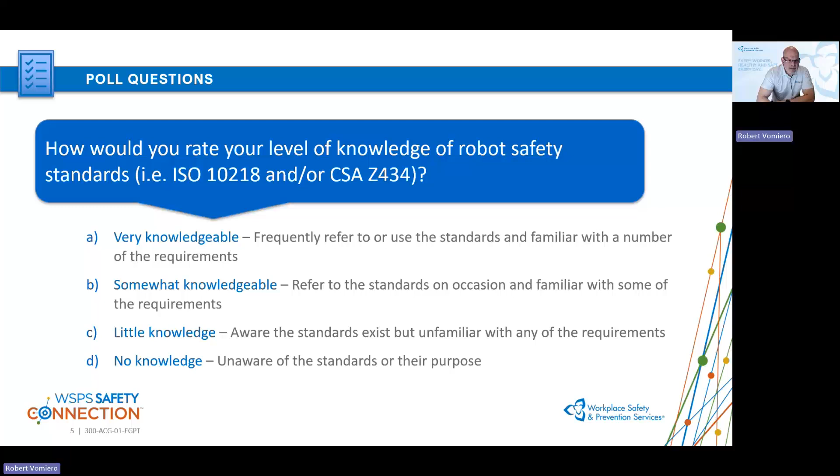Another poll question: to what degree has your workplace implemented robot applications that involve collaborative tasks? For those of you that are newer and not sure what that is, we will talk about that later on. But if you can take a minute and respond to the poll, that would be great.

Okay, so we're getting responses coming in. A few of you, about 10%, have incorporated multiple collaborative robotic applications. About 44% have incorporated one or two collaborative robotic applications, and a good number of you have not yet implemented any collaborative robot applications.

So why do we ask this question? The main reason is, as you'll see when I get into the content, the new Z434 includes and has implemented a significant amount of guidance with respect to collaborative applications. We will talk about what collaborative applications are and what collaborative tasks are. Basically, collaborative tasks are tasks where humans and robots share the safeguarded space or work together within the safeguarded space in close proximity, including in some cases making contact with each other. Now, of course, the robot requires certain safety functions to do this. We'll get into this a little later in the presentation, but it's certainly a field of robotics that's taken off, and we're seeing it more and more within workplaces. The new CSA Z434 provides significant guidance that did not exist in the previous version with respect to collaborative tasks and collaborative applications. So stay tuned for that.

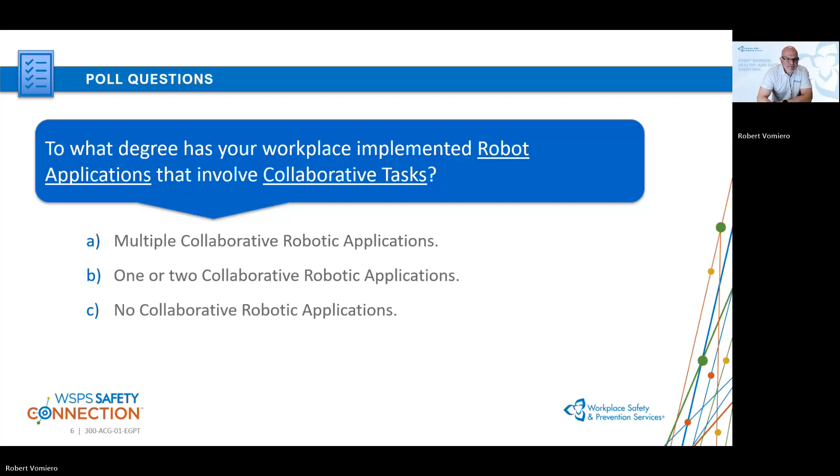Okay, so it's important to note that CSA Z434, the new 2026 version, is a full adoption of ISO 10218:2025 parts 1 and 2. You're going to hear me mention this over and over again throughout the presentation. But for those of you that are newer, yes, just like we did previously with CSA Z434-14, we have adopted the international industrial robot standard, ISO 10218 parts 1 and 2.

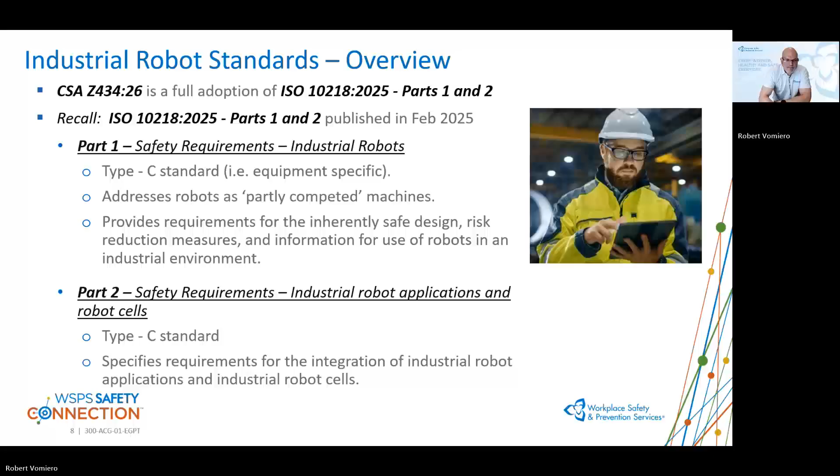So again, Part 1 focuses on requirements related to the robot, including safe design, risk reduction measures, and information for use in an industrial environment. Whereas Part 2 focuses on the application and the industrial robot cell. So in Part 2, we take the off-the-shelf robot and integrate it into the application. I know that's a review for some of you, but definitely worth mentioning.

So please note, just to be clear, the outgoing or withdrawn North American National Industrial Robot Standards. In Canada, the previous version of the robot standard was CSA Z434-14. That was a modified version of ISO 10218-2011 Part 1 and Part 2, and actually contained Canadian deviations. There was quite a number of deviations which provided additional Canadian-specific information and user requirements.

In the US, because I know probably some of your companies have locations or may have locations both in Canada and the US, the outgoing industrial robot standard in the US is RIA R15.06-2012. That was a full adoption of ISO 10218-2011. In other words, there were no deviations included in it. But the old version of the US R15.06 standard was the 2012 version.

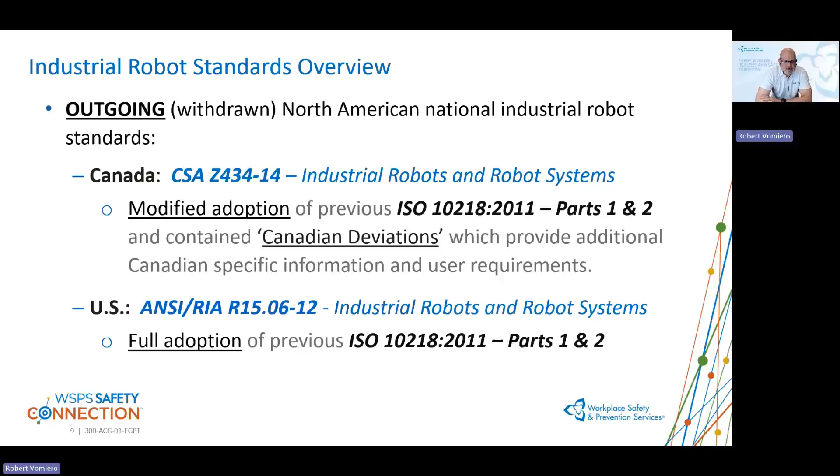We already mentioned that the new and recently published version of Z434 is the 2026 version, and it was published in May of 2026. And in the US, the current version of the industrial robot standard is A3 R15.06-2025, which was published last year in October of 2025.

So if you recall, I mentioned ISO 10218-1 and 2. The newest version was published in February of 2025. The US adopted that international standard as the US national standard in October of 2025, and we now have also adopted it in Canada as of May 2026 as our Canadian national robot standard.

Now, there are still a few deviations which are editorial in the Canadian standard, and some deviations related to Canadian-specific references, but I want to emphasize that both Z434-26 and R15.06-2025 are technically the same as ISO 10218-2025 Parts 1 and 2. Okay, so technically there's no difference between the Canadian, US, and international standard.

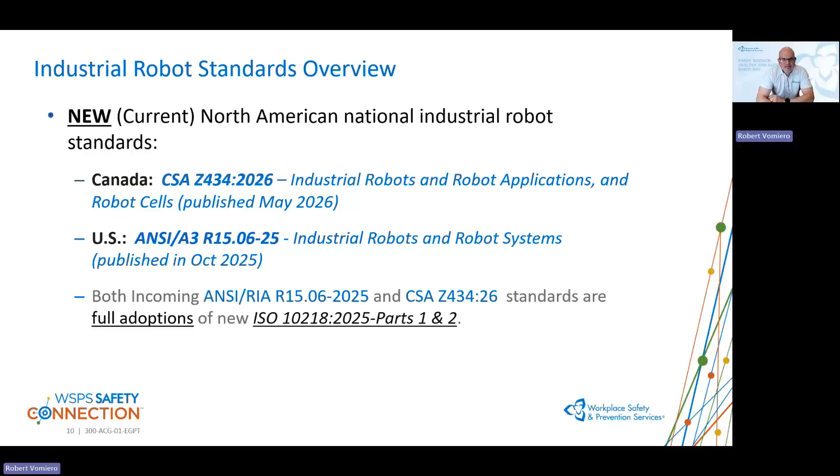So I already mentioned, but again, we can recall that Part 1 of CSA Z434 focuses on the robot. And really, it is intended for the robot manufacturer. So the robot manufacturer really needs to meet, if they want to claim compliance with Part 1 of the robot standard, the requirements outlined there. So think of your Fanuc, your ABB, KUKA, Nachi, UR, whoever. They're obviously going to be very interested in the requirements outlined in Part 1.

Whereas Part 2 talks about the robot application and cell integration. So again, it focuses on the application in the robot cell, and it is intended primarily for the robot integrator. So the robot integrator is that entity that takes the off-the-shelf robot and then integrates it into the application or the robot cell.

Okay, so no change there. The new Z434 still has a Part 1 and a Part 2. However, what is new is that both CSA Z434 and A3 R15.06 have developed and added an additional part, which is really a new standard. So in Canada, we have a new part to the standard called CSA Z434.1, and in the US, they simply refer to it as Part 3. This additional standard focuses on a piece that was frankly missing in previous versions of the standard. It focuses on safety requirements related to the use of industrial robot cells, and this new standard, the CSA Z434.1, focuses on end user requirements.

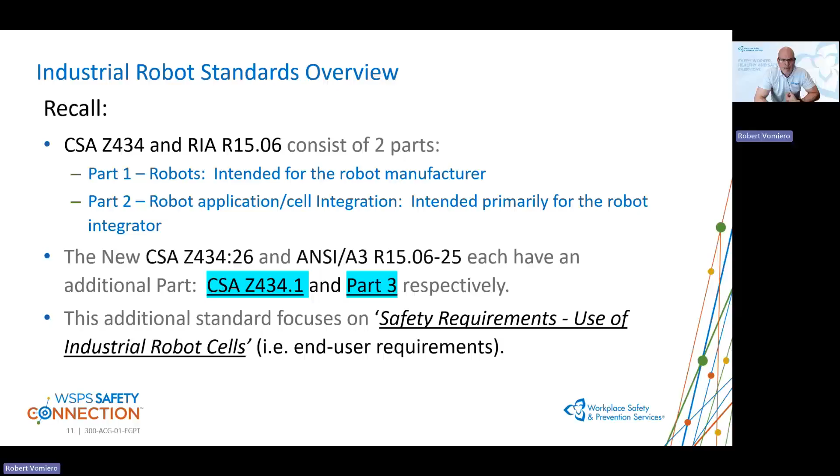And we'll take a bit of a look at what Z434.1 contains towards the end of this session.

Now, I didn't want to get too far into the weeds, but I did want to just highlight some terms and definitions that are included in the new CSA Z434 and highlight some changes in these terms and definitions, which will provide context and understanding with the direction that this new standard has gone in.

So the first term is the industrial environment. The new Z434, just like the previous version, focuses on robots operated in an industrial environment. There's no real change there. And of course, an industrial environment is a workplace where the public is restricted from access or not reasonably expected to be present for the intended tasks and robot applications. So we don't really expect the general public to be exposed to these robotic applications with respect to this standard and who these standards focus on.

Now, the industrial robot, or the definition for industrial robot, remains mostly unchanged but has been tweaked. So an industrial robot, again this is a bit of review for many of you, is an automatically controlled, reprogrammable, multi-purpose manipulator, programmable in 3 or more axes, which can be either fixed in place, and then... this is where the definition diverges between the previous and latest version of Z434.

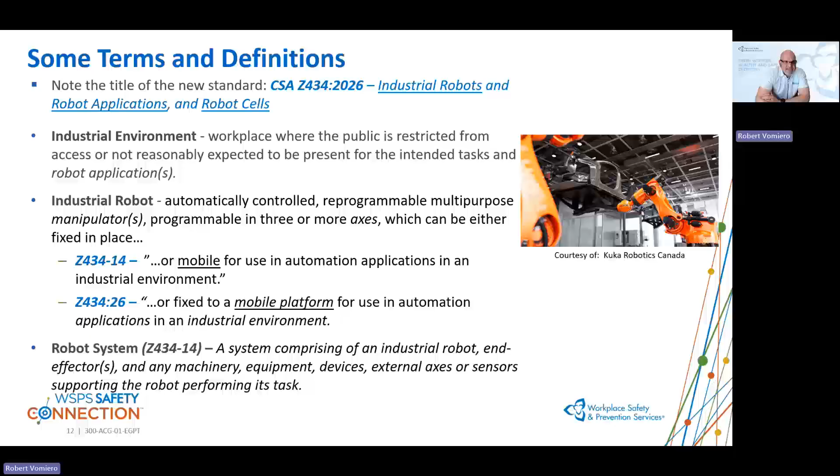In Z434-14, the robot system was defined as a system comprising an industrial robot, end effector, and any machinery, equipment, devices, or external axes or sensors supporting the robot performing its task. You'll notice in the next slide that the scope of this definition has been reduced for Z434-26.

The robot system now focuses on the industrial robot, end effectors, and any end effector sensors and equipment needed to support the end effector. Some of the other broader aspects that speak to the robot application used to be included in the definition for the robot system in Z434-14.

The term robot application is a new term, defined as a machine comprising an industrial robot system, incorporating the robot system, work pieces, task program, and machinery and equipment to support the application and the intended tasks. This new definition of robot application is quite similar to the previous definition in Z434-14 of the robot system.

I wanted to highlight that difference because you'll notice that the new title of the Z434 standard uses the term robot application instead of robot system, which is why I felt it was important to highlight this and why this change occurred.

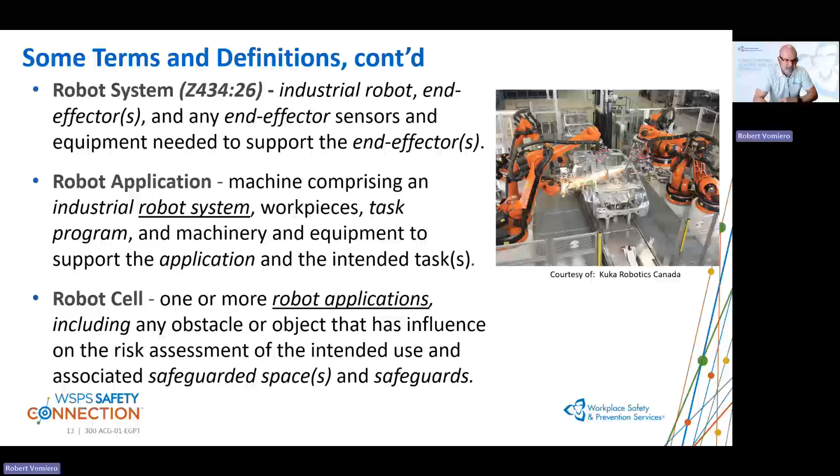It is the industrial robot application, and robot cell standard. The term robot system is no longer in the title of the standard, at least in our Canadian standard.

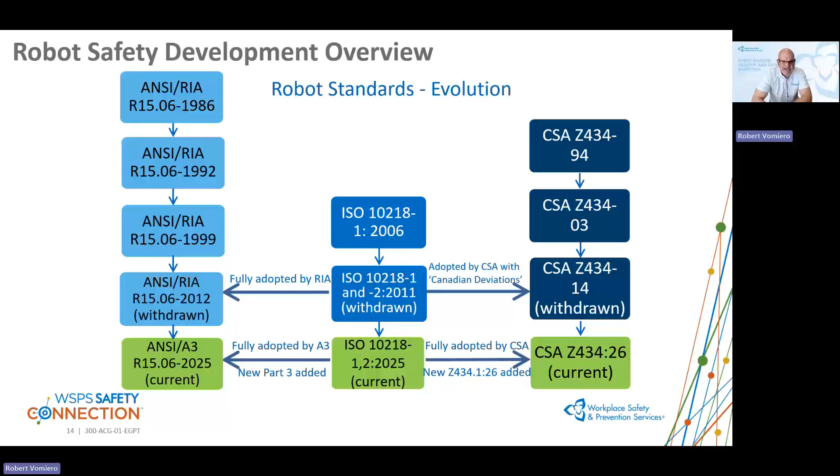All right, so that pretty much covers the general overview of the standards and gives some background on their development, the different versions, and what the different parts focus on.

I'm just taking a quick peek at the chat. I'm not seeing any hands. Marius, I'm not sure if there's any questions in the chat. Nothing for now. Okay, good. I think everybody's paying attention to the changes.

All right, good stuff. So I think we're going to move to the next topic where I highlight some of the changes in CSA Z434-26.

The first thing I want to talk about, which is a very important topic related to machinery safety in general, but certainly with robotics and robotic applications: something that hasn't changed is that a risk assessment is still required in both Part 1 and Part 2 of the standard. In Part 1, a risk assessment shall be performed for the robot that focuses on hazards and risk reduction measures related directly to the robot, since Part 1 focuses on the robot.

Typically, the risk assessment will include some form of a failure mode and effects analysis that focuses on the design aspects and possible failure modes of the robot. So things like robot materials, strength, other areas like braking capabilities, lifting points of the robot, and so on. It really looks at the grassroots design requirements for the robot.

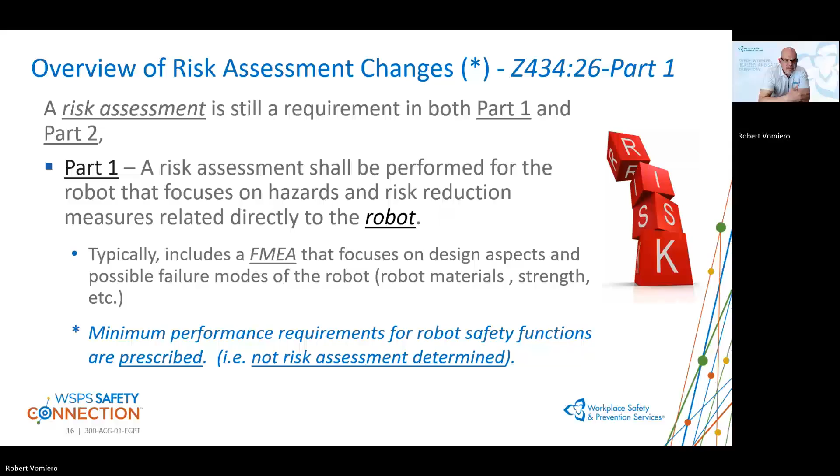One thing you'll notice, and that we're going to talk about in more depth later in the presentation, is that in this latest version of Z434-26, minimum performance requirements for robot safety functions are prescribed. They are not risk assessment determined in Part 1. You're going to see what that means when we come back to performance requirements and safety functions later on, but I wanted to highlight this point in relation to the risk assessment for Part 1.

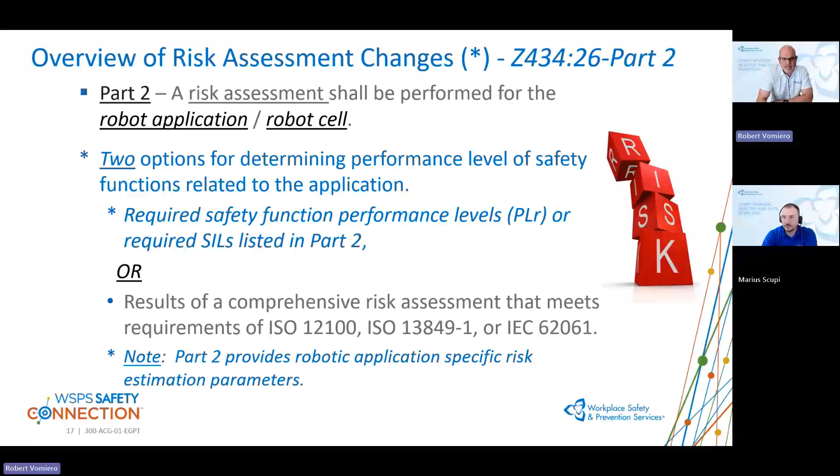So I talked a little bit about some of the changes with respect to the risk assessment. The big takeaway there was that risk assessments are still required for both Part 1 and Part 2, but I highlighted some of the changes in Z434:26.

What I'd like to do now is just summarize some of the other changes that you will find in the new CSA Z434:26. For those of you that plan on purchasing the standard or maybe already have some kind of viewing subscription with CSA, you will find a summary of the changes in both Part 1 and Part 2 in the foreword. I've just summarized these here, and we will go into a little bit more depth with some of these, not all of them, in the upcoming slides.

So in Part 1, we have additional requirements for the design of the robot itself, because Part 1 focuses on the robot. Things like robot position holding requirements without power. There's a lot more guidance provided on position holding requirements when power is interrupted to the robot actuators. What it speaks to is the reliability of that hold position, or that stationary position of the robot. There's been clarification and additional guidance provided with the braking or position holding capability of the robot outlined in Part 1.

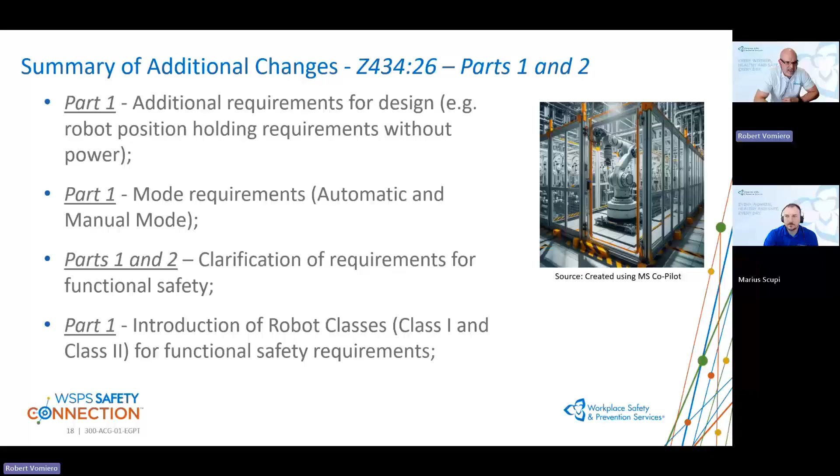Another change in Part 1 is test methodology to determine the maximum force per manipulator, or to verify the maximum force per manipulator, for Class 1 robots. So with the introduction of robot classes have come test methodologies in Part 1 for verifying that a Class 1 robot meets the Class 1 criteria.

Another Part 1 and Part 2 change is added requirements for cybersecurity. Not a ton of information, because there are other standards that focus on cybersecurity that Parts 1 and 2 point you to, but there is an added requirement with respect to a cybersecurity threat assessment for both the robot and the robot application - to prevent hacking of robots that operate through or on networks. We want to prevent hacking and outside influences taking control of our equipment and creating unsafe situations potentially.

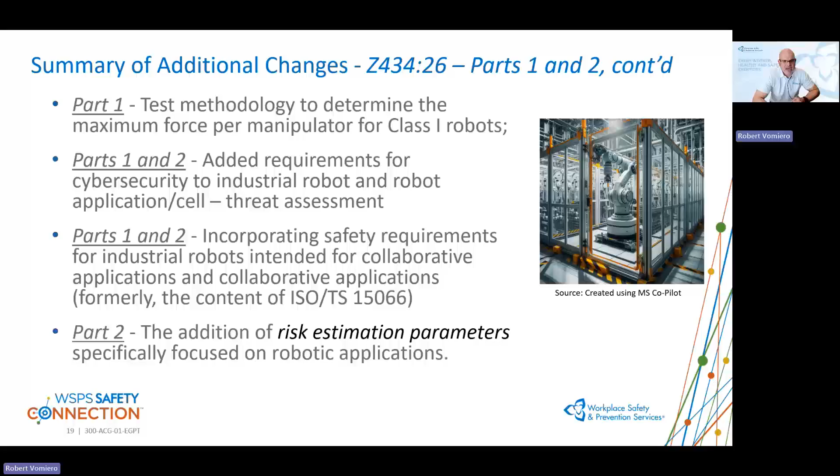And you will find these in the foreword of both Parts 1 and 2 of the new standard.

One new addition to both part 1 and part 2 is that a cybersecurity threat assessment shall be conducted. Cybersecurity measures for threats related to safety risks are to be implemented, which is the reason why we do the threat assessment. We want to ensure that unauthorized access is prevented to the robot control system, plus its hardware, software, application software, and any related configuration data. So the bottom line is we want to prevent outside influences from gaining control of our robot and our robot applications. I've highlighted an IEC technical specification and an IEC standard that focus more on cybersecurity risk assessments.

We don't get too much further into it than this for this presentation, but you are going to notice that many updated machine safety and robotic safety standards are going to include a requirement for a cybersecurity threat assessment. So let's continue looking at an overview of some of the changes.

All right, high-speed manual mode is not going to be allowed within the safeguarded space any longer. Is that okay? No questions with regards to that? No questions yet. All right, we'll keep going then.

This next slide goes back to functional safety requirements and performance levels of safety functions. The SRPCS, which stands for the safety-related parts of the control system, minimum safety performance requirement in the previous version of Z434 was a performance level D, structure category 3. This was for both the protective stop and the emergency stop functions. In addition, in the previous version of Z434, a risk assessment could determine alternate performance requirements.

Now, it was felt that there was a lack of clarity, or some ambiguity, with respect to performance requirements for specific robot safety functions in the previous version of the robot standard. Also, since CSA Z434 and ISO 10218 are Type C standards, equipment specific, it was felt that increased clarity was needed for performance levels of specific robot safety functions for both the robot and the robot application.

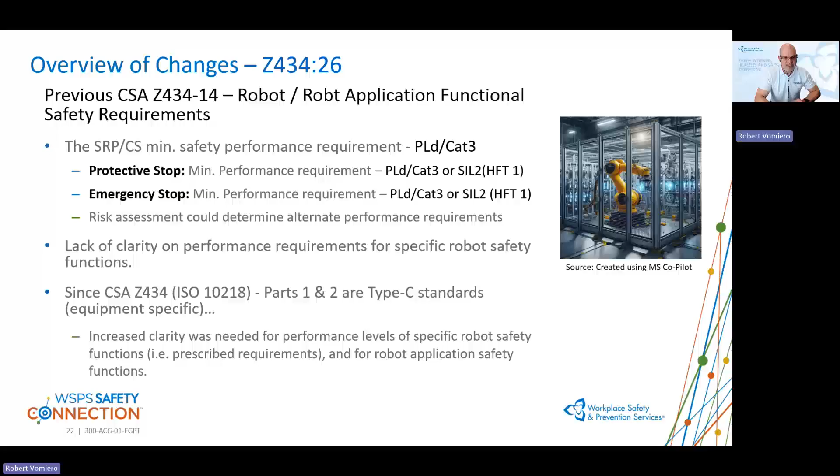So these are very new concepts in the new Z434 standard. And there are functional safety implications related to Class 1 versus Class 2 robots, which we're going to look at in the next few slides.

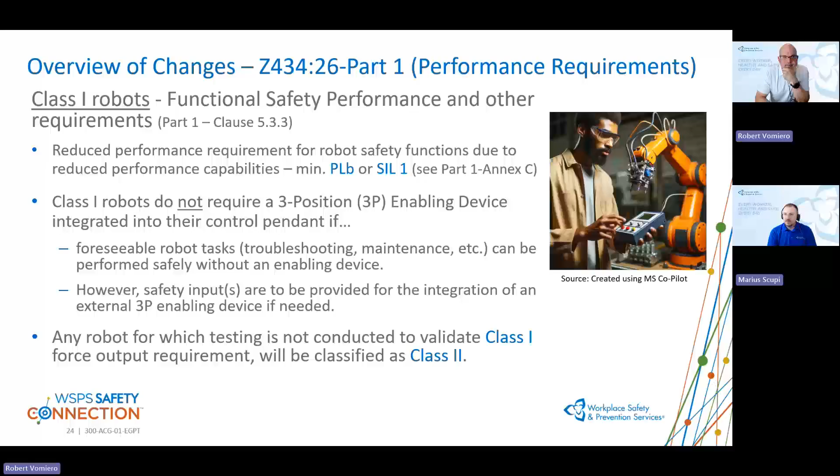Did I see a question, Marius? Yes, there's a quick question related to the mass on the previous slide - is the mass related to the payload, including the end effector, for the classification of the robots? I believe it does include the mass, but maybe we can mark that and I can verify. I think it does include the end effector and the payload, and certainly with a 10-kilogram robot. Actually, I'm going to recant and respond more definitively - it does include the payload. As you know, robots are rated based on their payload capability, so that 10 kilogram would include the payload, but I will double check just to make sure, and we can get back to whoever asked the question, Marius? Sorry, I'd have to take a look at my chat. Taylor Wood - okay, so Taylor, I'll verify that just to make sure, but I'm fairly certain it does include the payload of the robot.

Yeah, which would include the end of arm tooling and the part. Okay, which I know is not a lot, but hence the low risk related to the class 1 robot.

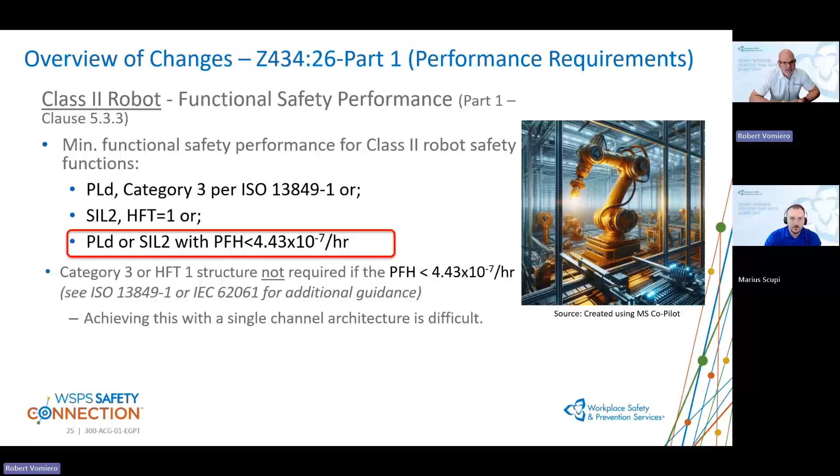This tells us that if you're following the previous version of the standard and your robots met the minimum performance requirement of PLD, Cat3, or SIL2 with an HFT of 1, you're going to be fine with this new robot standard as well. But with electronic systems, different approaches, different ways of achieving performance levels are now possible, which is the reason why this additional criteria has been added.

I also want to highlight that for Class 2 robots, in Part 1, Annex C, there are a couple of tables that have been added or included. They're referred to as Table C1 and C2. Table C1 are robot safety functions that must meet the minimum performance requirements of either a PLD Cat3 or a SIL2 with a hardware fault tolerance of 1, or a PFH of less than 4.43 times 10 to the negative 7, what we just looked at in the previous slide.

These are, of course, your more critical safety functions related to the robot, such as interlocking functions, protective stop, mode activation, software-based limiting, which limits the reach of your robot, for example, to prevent the robot from making contact with your perimeter guarding. So these are some of the more critical, and there's a whole list in Table C1 of Part 1. These more critical safety functions have to meet the higher performance level requirement.

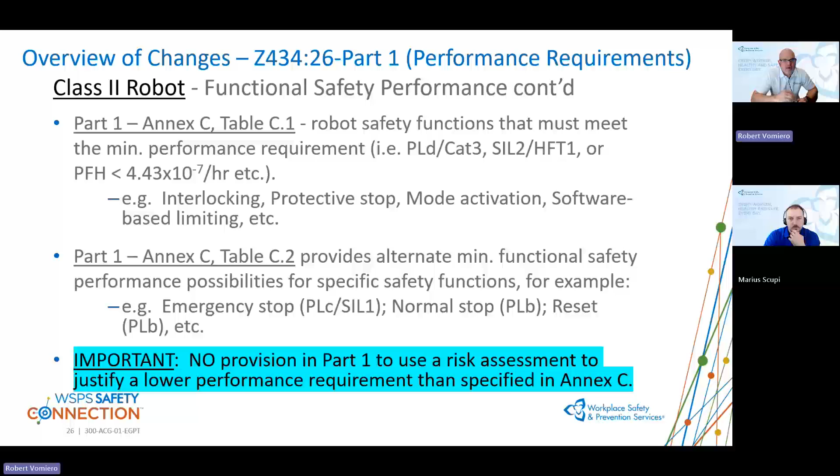Right, so I'm not seeing any questions. I'll keep going.

So what about Part 2? Similarly, Part 2 has added some additional functional safety performance guidance for the application. Like I mentioned earlier, there are safety functions built right into the robot itself, and then you're going to have safety functions related to the overall robot application. So Part 2 is a little bit different, and in some ways similar to the previous version of Z434.

2014, in that there are two approaches for the integrator to determine the performance of each required safety function. Again, there's an Annex C in part 2 that has a table C1, which lists safety functions and the performance level for safety functions related to the robot application. However, there's option 2: to perform a risk assessment and determine the functional safety performance for application-related safety functions based on the result of that risk assessment.

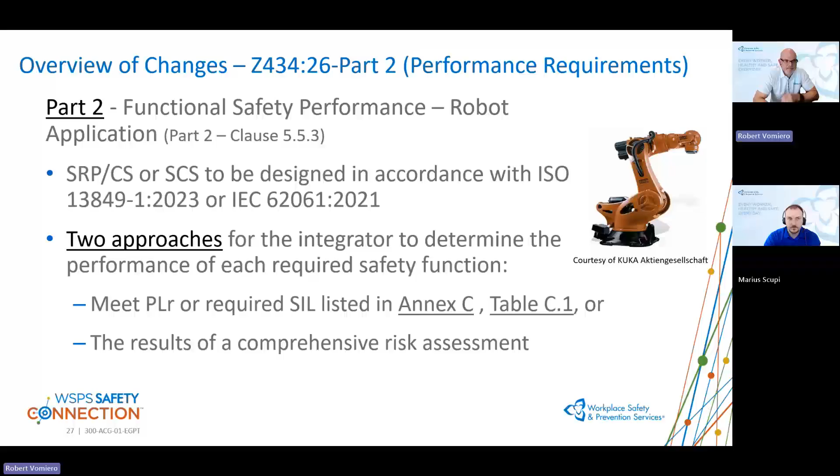And that's basically what we're talking about here. Of course, the prescribed performance level for safety functions in part 2, as you can imagine, aligns with part 1. So it's PLD category 3, SIL2 with a hardware fault tolerance of 1, or the probability of dangerous failures per hour being less than 4.43 times 10 to the -7.

And as I mentioned, this last requirement that's been added for performance requirements of safety functions in part 2, like part 1, has been added because newer electronic-based systems can achieve this very low probability of dangerous failures per hour with some of these newer electronic system technologies. Whereas with your mechanical or electromechanical based safety functions, you really can't achieve PFH of less than 4.43 times 10 to the -7, because you need to achieve a very high diagnostic coverage and a very high mean time to dangerous failure for the safety function. So this new criteria added in both part 1 and part 2 is really for electronic systems or subsystems, okay?

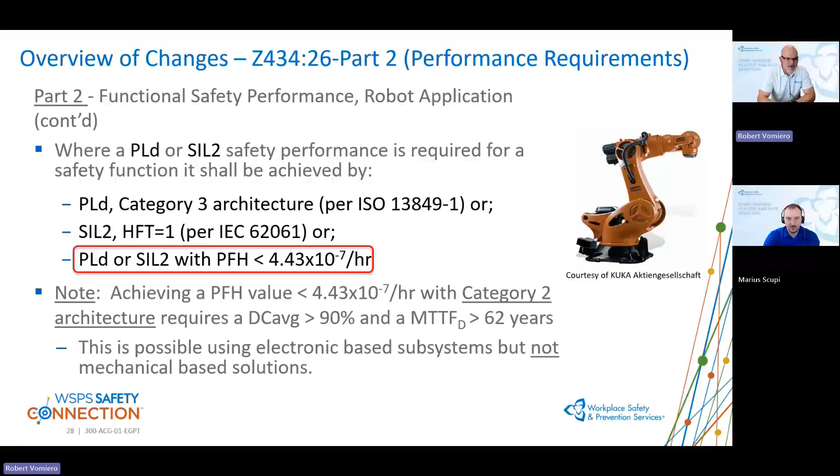So again, I'll take a quick pause. I'm not sure if there's any questions about functional safety. Not yet, no. But we're going to move off that topic and move on to stop functions.

There's a lot that's the same in the new Z434 as the previous version. Of course, the new Z434 requires that there be an emergency stop function, which is a function intended to avert or reduce existing hazards, as well as a protective stop function, intended to stop the machine in response to a safety-related event. Our emergency stop devices are integrated into the emergency stop function, and our other safeguarding devices like light curtains, safety interlock switches, and so forth are integrated into the protective stop function.

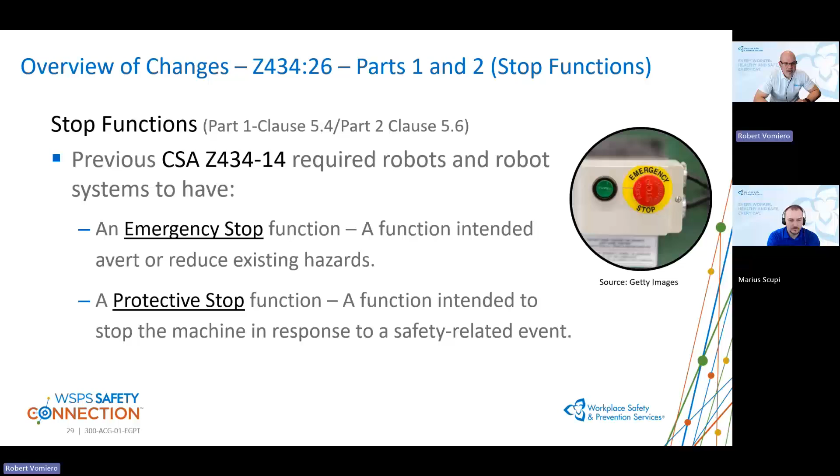Something new in the new CSA Z434 in relation to stop function is the requirement to include a normal stop function, which is a function intended to stop a machine as part of routine operation. It has a lower performance requirement, minimum performance level B. The normal stop is intended for your day-to-day stopping of the robot application or the robot as part of normal operations.

Of course, we don't want to hit an e-stop every time we want to stop the application under normal operation, because the emergency stop can be much harder to recover from. It's a type of stop that's much harsher on the system, in that it may not retain some of the logic, some of the positioning logic related to the robot and the application and so forth. The big reason why... oh, go ahead, Marius.

Sorry for interrupting, Rob. We have a quick question from Diana. She's asking if the normal stop function is intended for minor servicing tasks. I would have to say, without going too far into that very important and relevant topic, definitely not. The normal stop is not intended to be used for minor servicing tasks. It's meant to stop the robot once integrated into the application itself. Think of the end of a shift, stopping your application once the operator is ready to leave. It's a way of stopping the application.

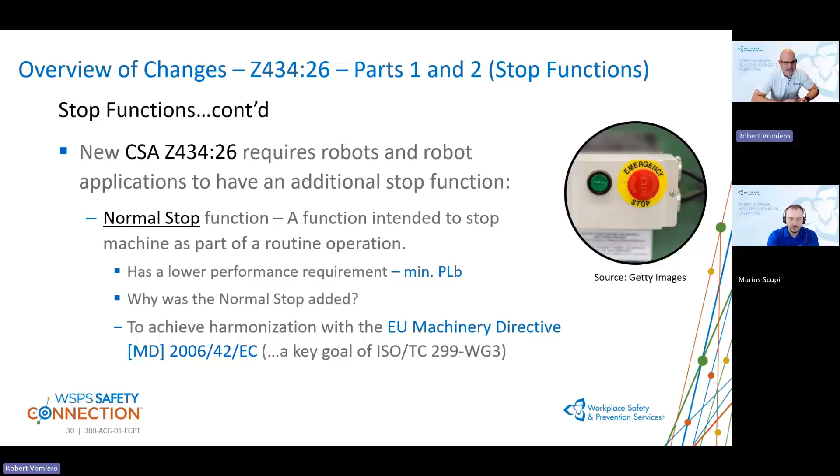Again, the reason for the answer there. Why was the normal stop added? Just as an FYI to everyone, which is not maybe a big issue in Canada, but when the ISO 10218 latest version was being developed, they wanted it to be what is referred to as a harmonized standard, meaning it needed to be harmonized with the EU Machinery Directive. The EU Machinery Directive does include a requirement for a normal stop in conjunction with the other stop functions. So this is one of the big reasons why this was added to the standard, not to make everyone's life difficult, but really to try and make this a harmonized standard internationally.

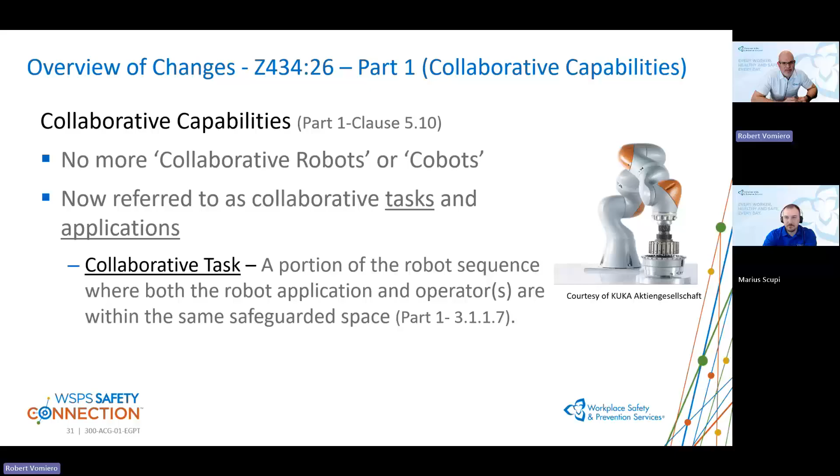In other words, safeguarded space sharing with the human will have to consist of certain collaborative capabilities or safety functions. So a new term you're going to see in Part 1 is the collaborative task. It is a portion of the robot sequence where both the robot application and operator are within the safeguarded space.

When we talk about what those actual collaborative capabilities are, there are 3 in Part 1: hand-guided control, speed and separation monitoring, and power and force limiting. Now, these used to be referred to as types of collaborative operations, but they're really not. These are actual collaborative capabilities that industrial robots have to be equipped with in order for them to be suitable for collaborative tasks.

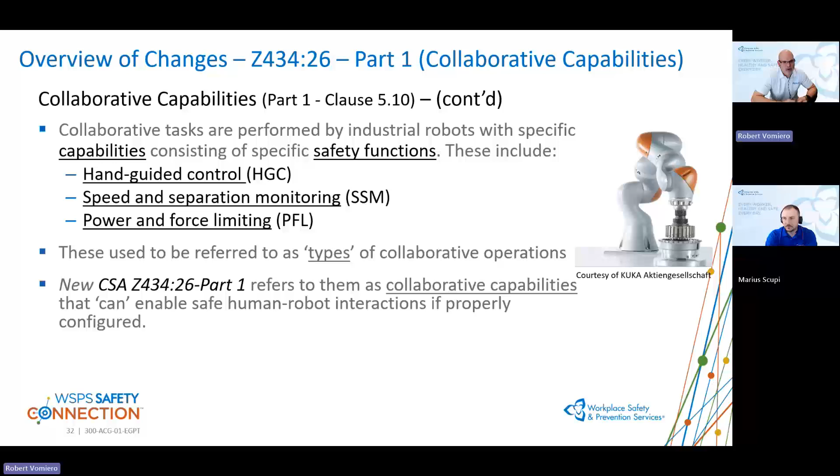There used to be another collaborative capability included in the previous version of the standard called safety rated monitored stop. This has been removed in the new CSA Z434, and the reason is that what we used to refer to as safety rated monitored stop, now referred to more correctly as monitored standstill, is actually a safety function that is incorporated into the other collaborative safety functions or capabilities. In other words, hand-guided control, speed and separation monitoring, and power and force limiting all involve the monitored standstill safety function, so it's really not a standalone safety function or collaborative capability on its own. Hence the reason why it is not listed separately as a collaborative capability or safety function.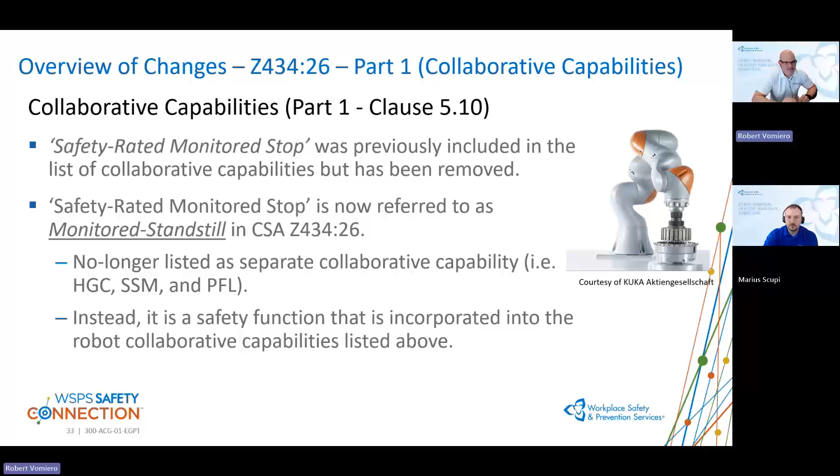Okay, so that deals with the robot itself. What about the application? Again, a new term you're going to find in Z434-26 Part 2 is the collaborative application, which are robot applications that contain one or more collaborative tasks. Part 2 provides guidance on risk reduction considerations for collaborative applications, not just the robot. So the risk assessment is required to determine protective measures to identify possible contact events between the human and the robot, and risk reduction measures to prevent quasi-static crush hazards and transient hazards, otherwise called impact hazards.

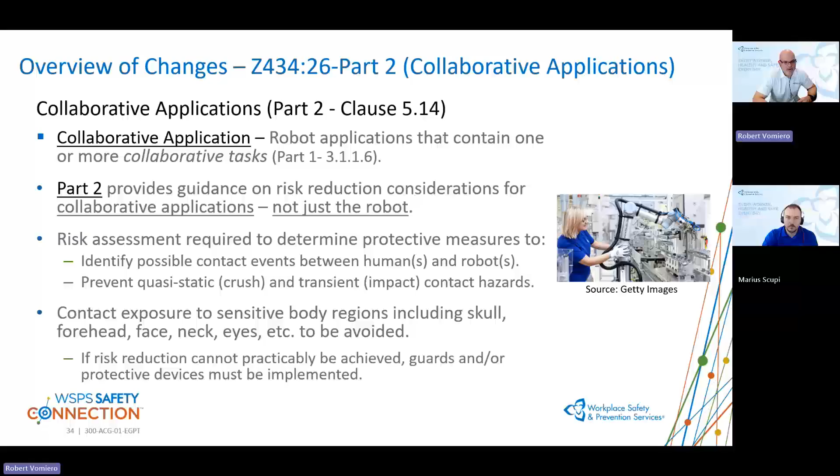Also, contact exposure to sensitive body regions, including skull, forehead, face, neck, eyes, and so forth, needs to be avoided. And where risk reduction cannot be practically achieved in the collaborative application, there may be a requirement to add traditional safeguards to prevent those contacts with sensitive areas. So these are just some things to think about when we're talking about collaborative applications. The risk assessment really has to focus on those contact events and interactions between the human and the robot.

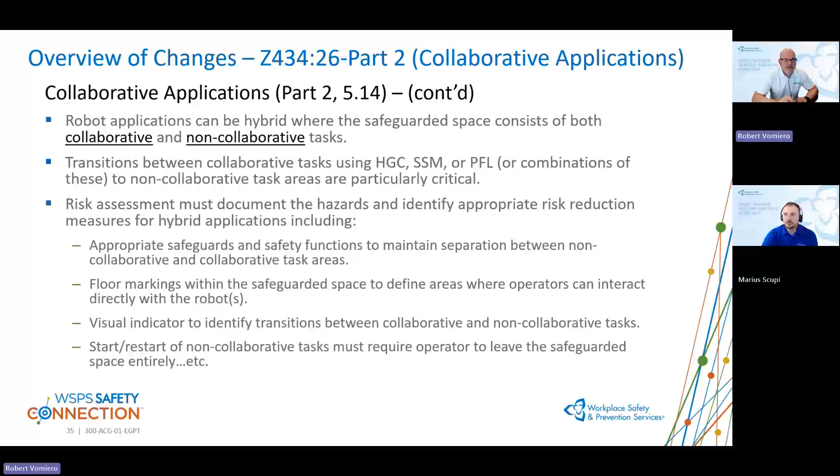We can also have hybrid applications, which can include both collaborative and non-collaborative tasks. The non-collaborative task would be more of your traditional tasks where your robot operates at higher speeds, higher force and pressure outputs, and so forth. In these types of hybrid applications, the transition point between the areas of where your collaborative tasks are being carried out and your non-collaborative tasks become very critical, need to be appropriately safeguarded, and definitely need to be focused on in the risk assessment.

Just a bit more of an aside with power and force limiting collaborative applications, just to highlight what we're seeing in the field. Unfortunately, I don't have too much time to spend on this, but collaborative robots are not inherently safe. Contrary to maybe some misconceptions that exist in workplaces and in the field, they are not inherently safe. And collaborative applications may or may not require safeguarding. It all depends on if they are configured correctly. So please do not assume that collaborative applications automatically do not require safeguarding.

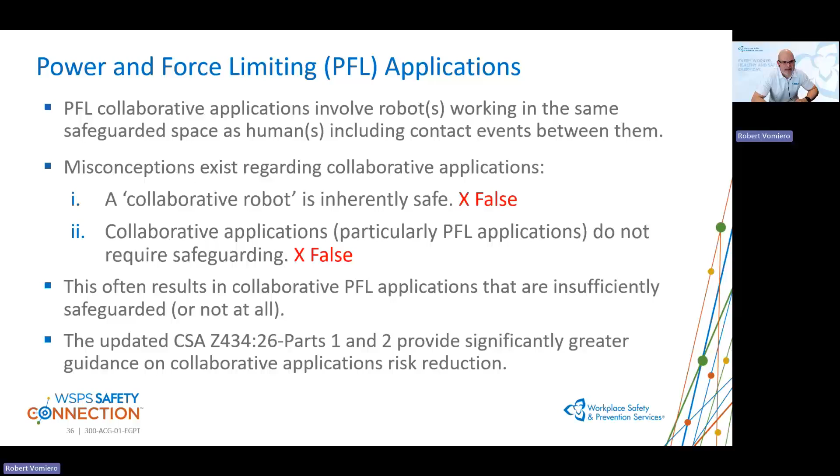I just want to highlight those two things. Please, if you need more guidance on this, please reach out to us. Or again, your pre-start providers that have experience with collaborative applications, because there is more guidance we can provide on this.

Please also note that some of that significant additional information you will find in Part 2 with respect to collaborative applications is Part 2 Annex M, Table M2, which is a table of biomechanical force and pressure limits for 29 regions of the body that the robot application cannot exceed, in order to keep those interactions between human and robot low risk.

Also, Part 2 Annex N provides guidance on the validation methodologies for maximum force and pressures related to collaborative applications, and some guidance on the use of pressure and force measurement devices. So again, Annex N is an informative annex. It's intended to provide guidance, so it's not normative per se. But what is a requirement in Part 2 is that some form of verification and validation, i.e. testing of pressure and force outputs for power and force limiting collaborative applications, is performed. So the validation of those power and force outputs for your collaborative capable robot and robot applications must be validated, and that is definitely a new requirement in Part 2 of the standard.

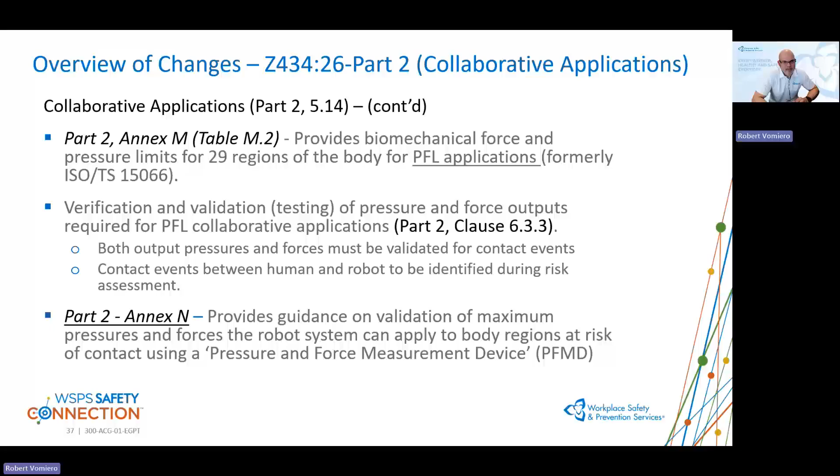So just some challenges with Annex M. Which body parts during the application are likely to be exposed to contact events? These need to be identified. How to avoid quasi-static contacts, which are crush contacts. How to reasonably prevent contact with sensitive areas of the body. How do you repeatedly and accurately measure force and pressures to validate the application? Annex N provides some of that guidance.

And what happens when values in Table M2 are exceeded? Sometimes force values might be exceeded. Sometimes pressure values are exceeded, depending on the application. In certain instances, you'll focus on force more. In certain instances, pressures are more critical. We can provide more guidance on that moving forward. Not a lot of time here, but I just wanted to highlight that.

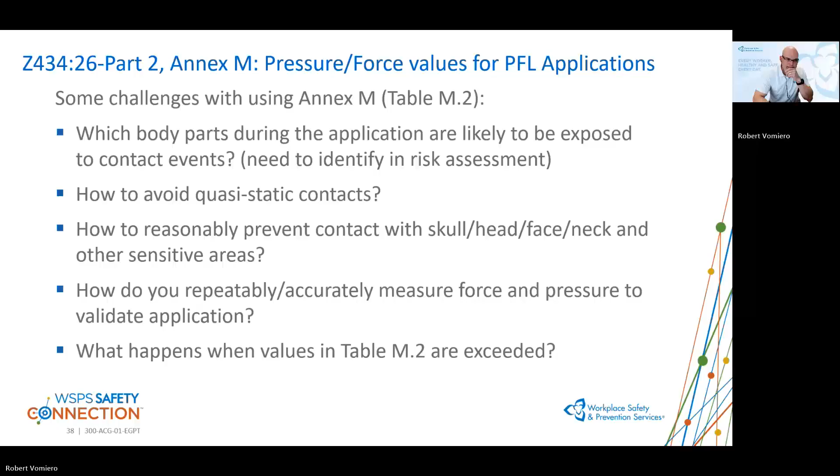Now, the next couple of slides, I'm not going to spend very much time on at all. You can certainly have a look at these in your standard, but I just wanted to highlight the number of annexes in Part 2, and why the new Part 2 of Z434 2026 is so long, because there's been a lot of additional information from other technical specifications and technical reports added into Part 2, as you can see in Annex I, J, and Annex M.

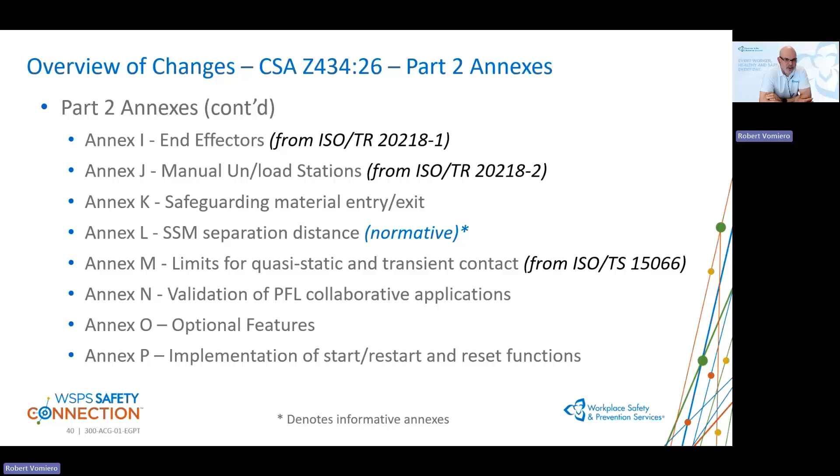In Annex M, the information from the ISO technical specification 15066 for collaborative applications has actually been incorporated and made normative in Part 2, in what we call Annex M. So I just wanted to highlight that.

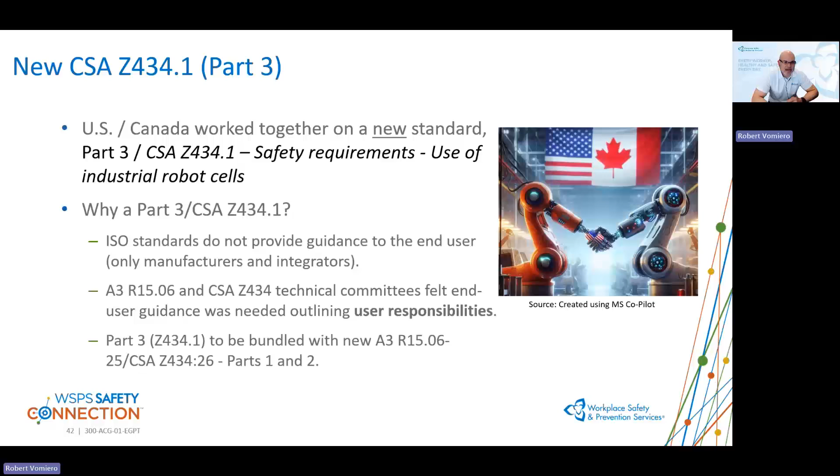So let's take a minute and talk about Z434.1. Not really much in this session, but I wanted to highlight that there is a new part that has been added to the new Z434 standard. It's called Z434.1, and it focuses on end user requirements. The US has a similar third part, and they call it Part 3.

Z434.1 focuses on design considerations, interaction with integrators, implementation of information from the integrator, so the information for use and how that should be implemented by the end user. It highlights training requirements, the requirement for a user risk assessment, so not just an integrator risk assessment but a user risk assessment should be performed to make sure that the application incorporates the appropriate risk reduction measures and has achieved the appropriate risk reduction, and how to maintain acceptable risk.

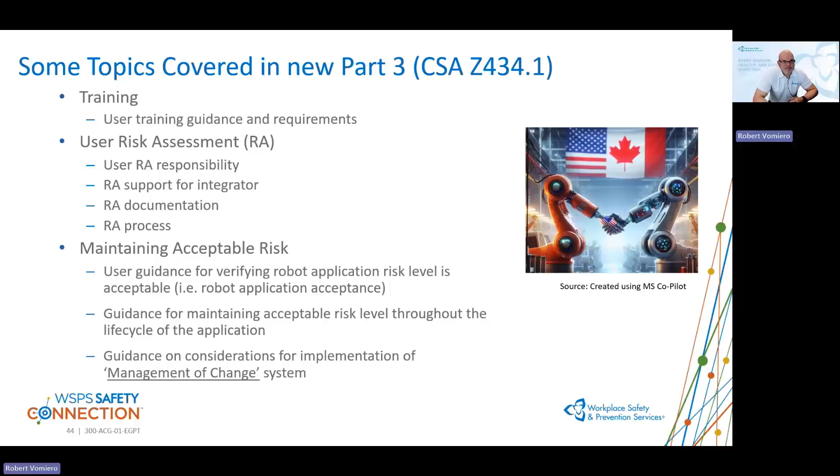Okay, upcoming technical report. Just FYI for everyone, ISO is working on a new technical report called ISO TR 10218 Part 3. It's in the draft stage, and the idea of this new technical report is to provide additional guidance. We won't really have anything like this in Canada, but it will provide guidance on the implementation of Part 2 of the new ISO 10218, which will help us with the implementation of the new Z434 2026 Part 2. So please stay tuned for that. It contains examples, like sample applications and examples on some of the different topics contained in Part 2.

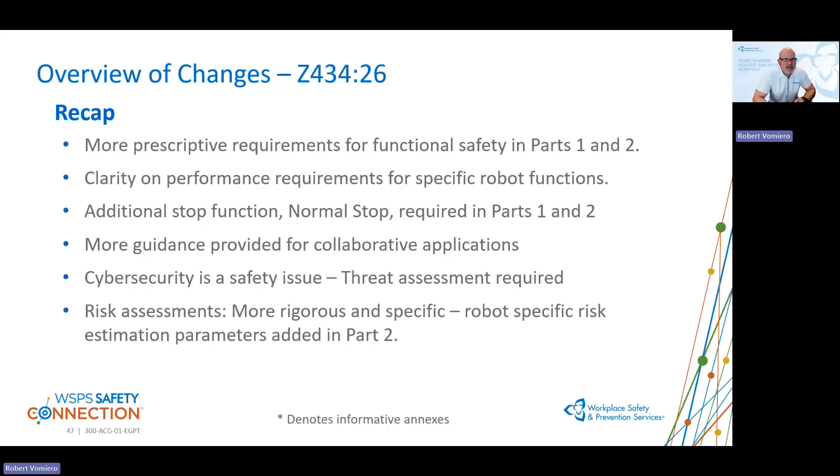So we're pretty much at the end of both our time and the session. Again, just a recap on this slide on some of the changes that we highlighted in the new Z434-26.

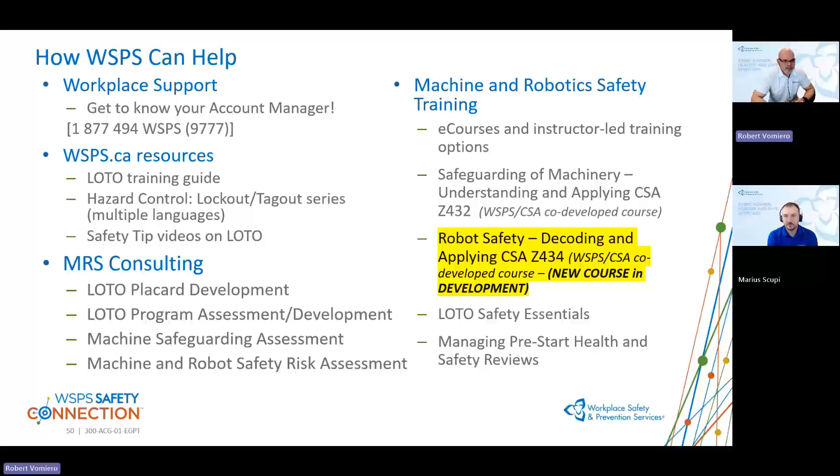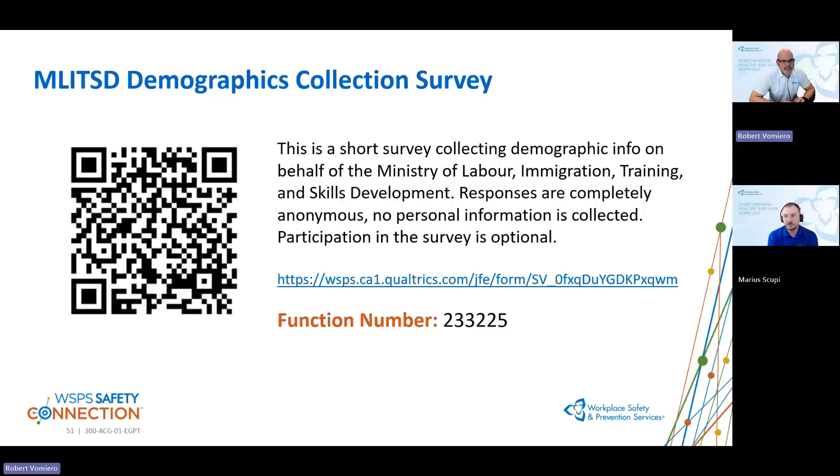And that's pretty much it for me. I know I've used up all of our time, which I was hoping to have a couple of minutes left. We have a quick question from Taylor, asking when would this new Z434 course be available for training? Yes, that's the million dollar question that I'm getting, since I'm one of the people working on it. We're hoping that it's going to be the fall, Taylor. That's what we're targeting. Thank you.